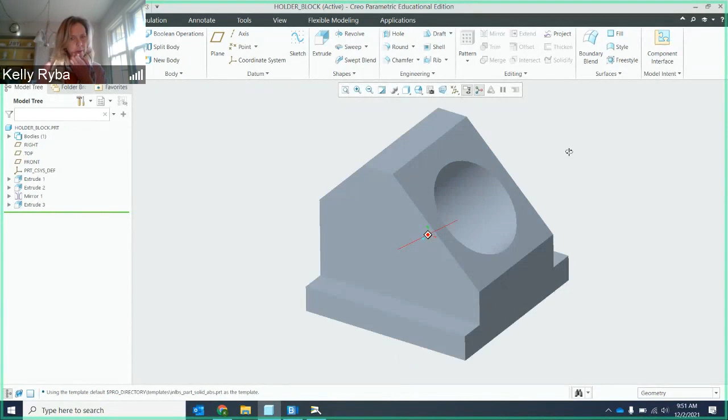I wanted to do a video on the process of doing our first extrusion, as far as the assignment in the extrusion problems—I think it's chapter 4 in your book. So here we have the holder block. I already created this, so I wanted to show you the process of going through and creating this model.

First and foremost, whenever we start Creo and get in, we want to be sure we set things up. I'm going to start a new file here, and we set things up so that our working directory is in the same place. I've already done that, I have a working directory set up. So before you start a new part, up here when you start new, make sure you have your working directory set up beforehand. It's not an afterthought.

We're just going to start new, and we want to start a part, okay, a solid part. I'm going to give it the name that it has here, holder underscore block, and I'm going to call it 1 because I already saved this other one in the background here. So I want to start a new one. I'm going to hit OK, so now I'll have a nice fresh screen here.

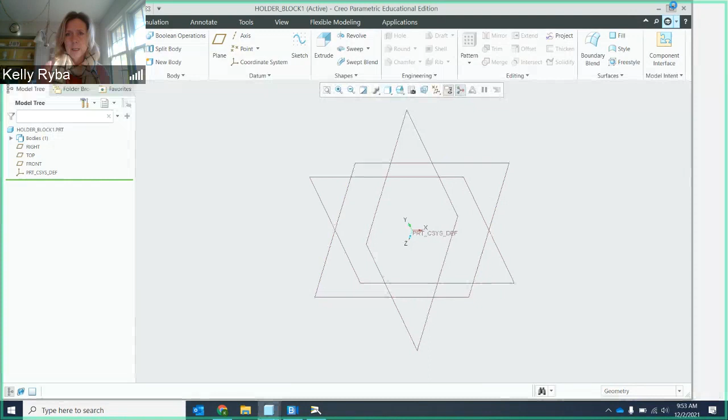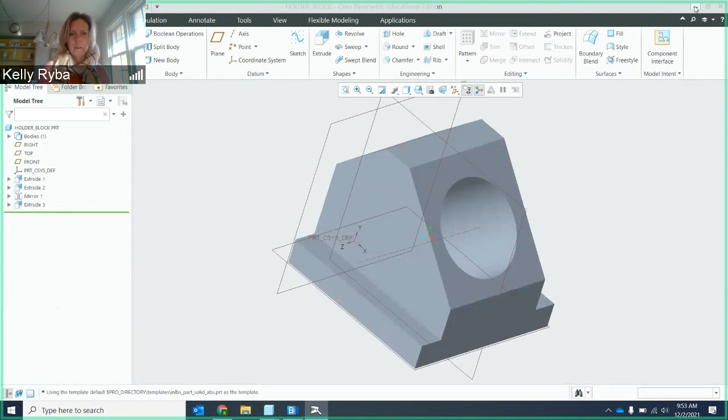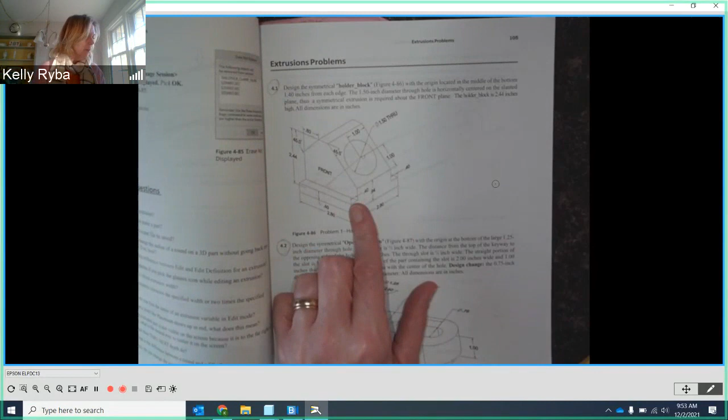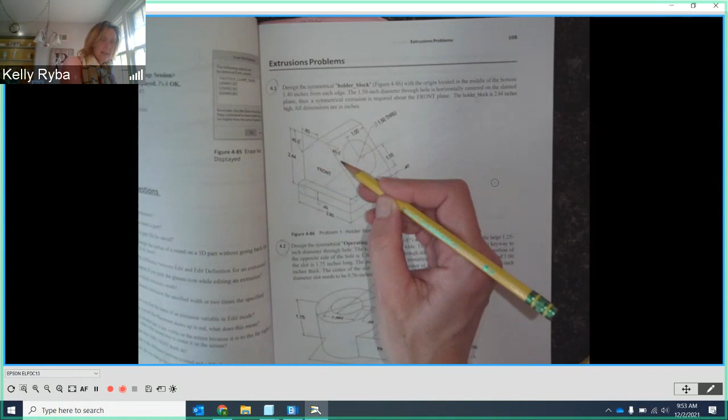So what I'm going to do is create the profile actually starting all the way at the bottom here, along this, as I'm looking straight in this direction. That's going to be the first thing I'm going to do, and I'm going to put that on my front plane. So I'm going to minimize this and open this back up.

I know that when I draw my sketch, instead of starting with the sketch here, I am actually going to start by saying I know that I'm going to extrude an actual sketch. So why not go right into the extrude? That's what you're going to notice we're going to be doing most often going forward. So I'm going to hit the extrude right away.

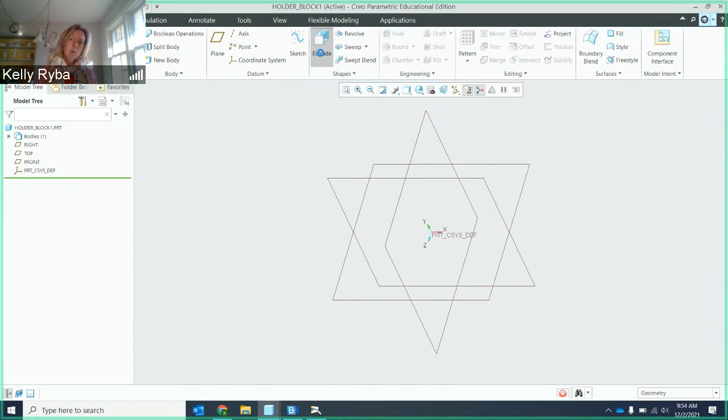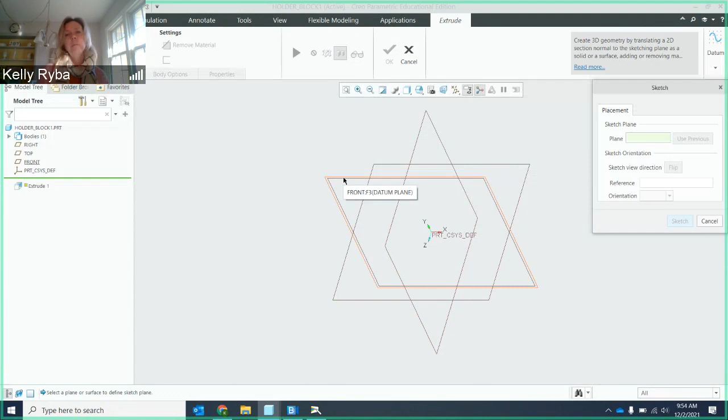When I do that, it wants to know what plane you're starting off, what plane do you want to place this on. So we're going to go to placement and do define. I'm going to hover over these planes, and when I do that it'll let me know what plane it is—you'll notice it says front here, or top, or right side. I'm going to go on the front plane here because that's where I'm starting. So I'm going to click on that, it's going to fill this information in, and I'm going to say sketch.

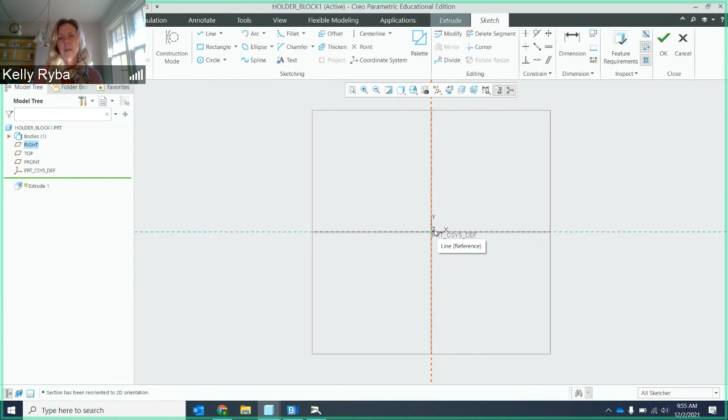Now, if your sketch plane doesn't automatically come up, you can hit this button right here, sketch view. And then now we're kind of looking right at it like a piece of paper, and I'm going to start sketching on here. Now because this is set up and it's like a really large screen right now, what I tend to do—because this is only going to be like a 2.8 by 2.8 footprint—I'm going to zoom way in, okay, way in, rolling a couple different times. Here's the intersection at the beginning here.

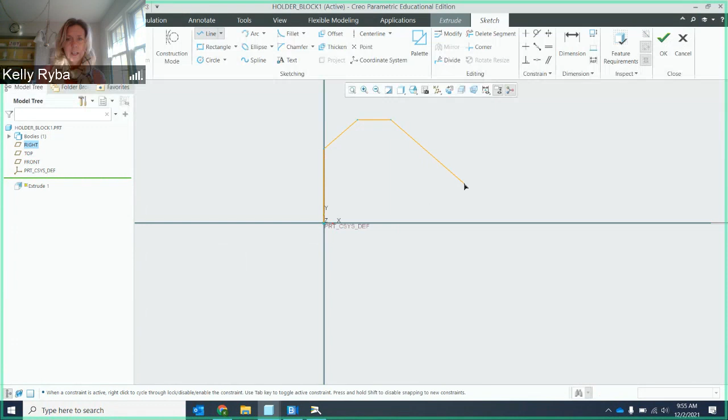So what I'm going to do is start in that bottom left-hand corner with a line, and I'm just going to draw the profile that I see there. So I'm going to go up a distance, a little over, a little bit of a straight, kind of down like this, down, and then click back, and then middle mouse button to end, and middle mouse button one more time. Now by doing that, you'll notice that I am zoomed way in, much smaller.

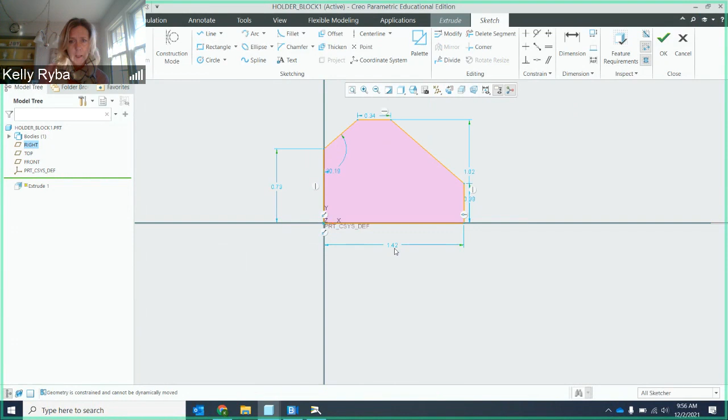So what I'm going to do is just push my dimensions out here, and I'm going to—oops, let me grab that—change them accordingly. So I need this dimension overall to be 2.8. Okay, so I kind of stretched it out there. I need this dimension—actually, I want a height dimension, overall height dimension. So I'm going to create a new dimension, click this top, bottom, and then middle mouse button over here. And this needs to be 2.44. So it's going to pull that up. Okay.

I'm going to here. I know it looks a little weird right now, that's okay. Then we're going to do a 45-degree angle from... actually, I'm going to wait on that because this is a little goofy right now.

I'm going to do a dimension from here to here, and that is going to be 0.8. There we go. And then I know that this is now going to be 45 degrees.

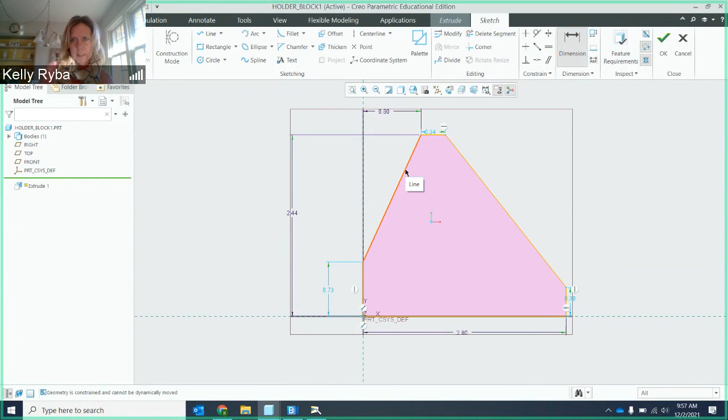Now it's a better time to do it. Otherwise, if I do too many things at once, sometimes it's going to get really skewed. So I'm going to do a dimension from here to here, and that needs to be 45 degrees. There we go, okay, all right.

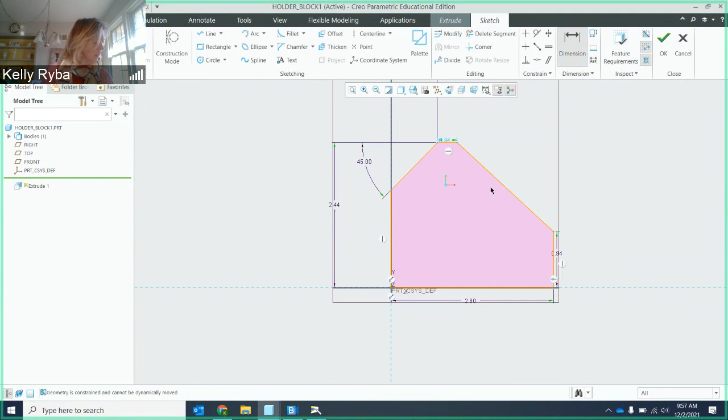Now what I'm going to do is add the dimension over here. 0.39 needs to be 0.94. Okay, and I think this needs to be a 45-degree angle too. I can't forget that. So this needs to be from here to here, a 45-degree angle there as well.

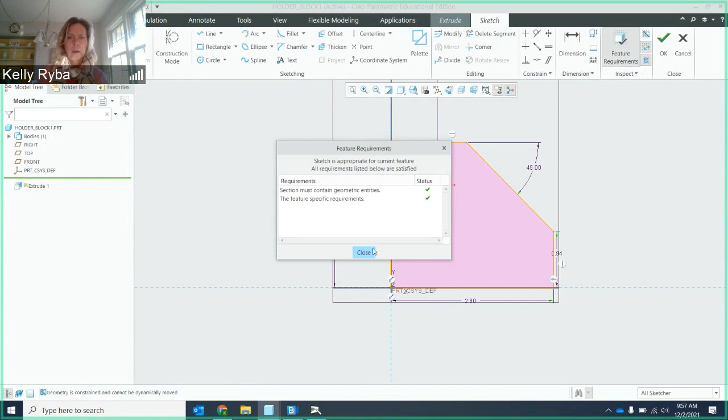Okay, there we go. So it looks like I have all the dimensions, and I like to, before I do an extrude, check if all my feature requirements are set. If I do that and I see only green check marks, I'm good to go. So I'm going to hit OK here, or close, and I'm going to hit OK.

Now it's going to go into the extrude mode right away. I don't have to tell it to extrude because I told it I was going to extrude before I started sketching, so I have to have a sketch to extrude. Now I'm just using my middle mouse button here to maneuver around, and right now it's assuming this is the direction I want to go in.

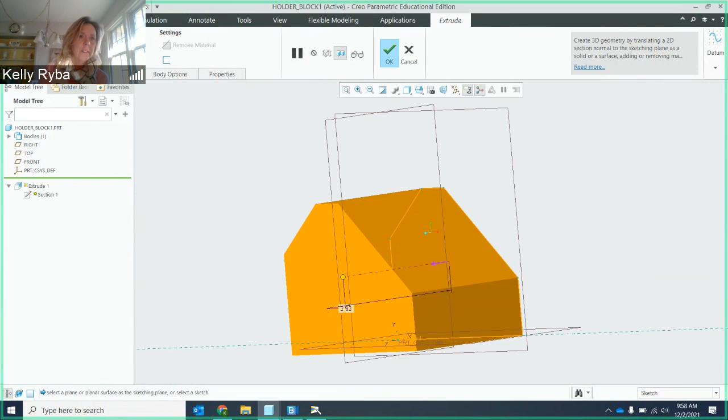I'm actually going to split this in the middle. So I'm going to do, what do they call that, an extrude symmetrically on both sides of the sketch plane. Since I was on the front plane there, I want to use that, and that's going to be evenly distributed in both directions. So I'm going to click on that, and then this is going to be the overall depth, not just one direction, okay? It's going to be the overall.

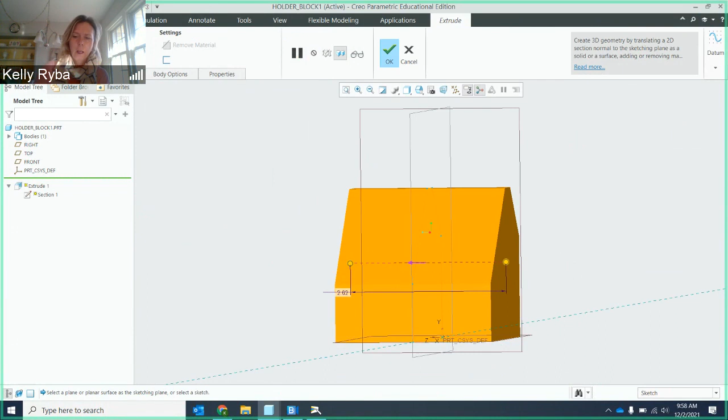So if we look here and I go to the side, it's the full thickness. Now, when I look at the full thickness of this extrusion, it's going to be 2.8 minus 0.8, because either one of those feet on either side is 0.4, and I only want the section in the middle. So this is going to be 2 inches.

Okay, so there we are. There's my base, if you would, kind of the body of my block. And I'm going to hit OK. That looks good to me.

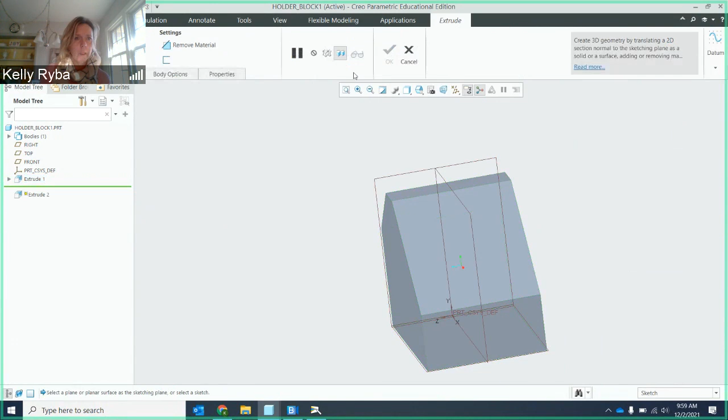All right, now what I'm going to do is add my feet to the ends here. So I am going to do an extrude, and I want to place my plane again, okay? I'm going to define it and place it right here. I want to look at the front of it, okay? And I'm going to hit sketch, and then do my sketch view so that I'm looking straight on, okay?

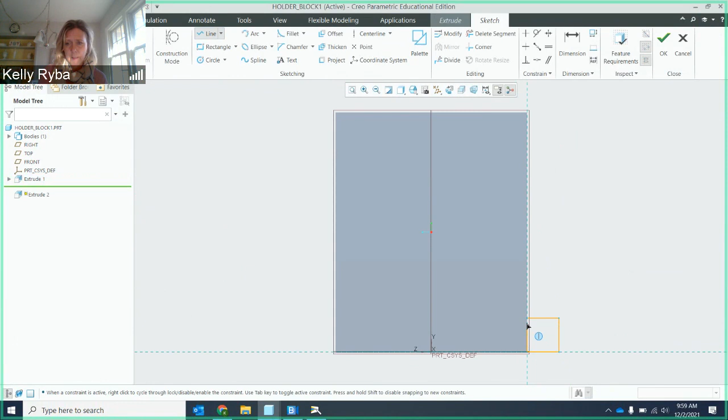Now what I'm going to do is sketch the profile of one of the feet. So I'm going to go line, down here, and I don't want to click to anything except — no midpoints or anything like that, so be careful not to do that. I just want it to be coincident there, and then you have to close the box, okay? Even though you're kind of putting it on the side there, you have to close the box.

So here's my dimension, 0.35, 0.33, and I'm going to change each of those to 0.4. Okay, and that should be all I need.

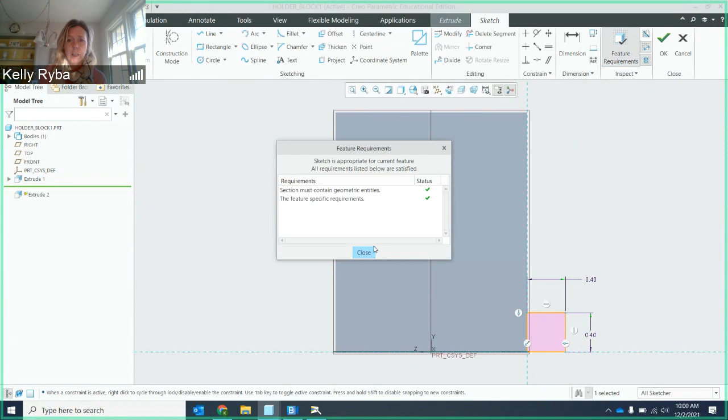So I'm going to just recheck my feature requirements. That looks good, so I'm ready to extrude. Okay, and then when I come back over here, I always like to maneuver myself around and see which way it's assuming. So I don't want it to go out that way, right?

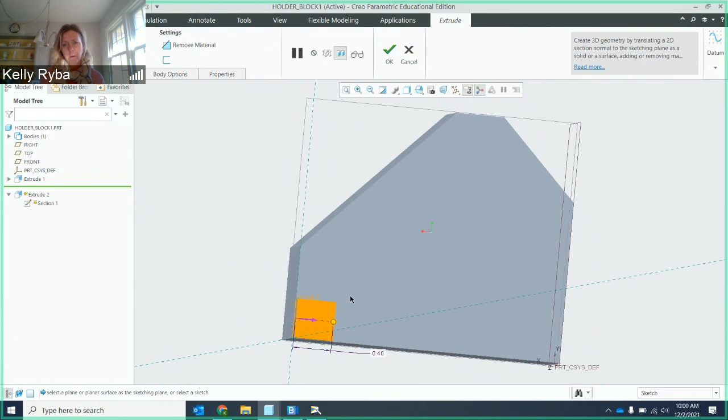I want it to go the opposite direction. So what I can do is either flip it up here by the number on the menu, or I can just simply click on that purple arrow. Okay, and now it's going in the right direction that I want it to go in.

And I need that to be a depth of 2.8. Okay, and there it is. Once I'm like, okay, that looks good, I'm going to hit OK. Okay, that's done.

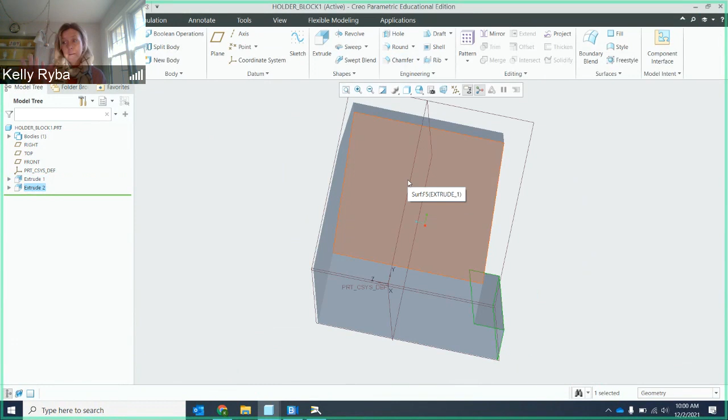Then the next thing I can do now, since this is the very same size on the opposite side, I can mirror this. I could redraw it and do the same process on the other side, but why? I'm going to mirror it.

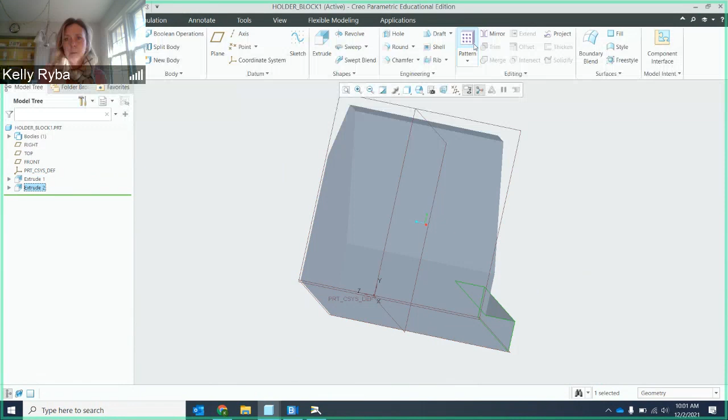You'll notice that I have extrusion number 2, which is what I just created. I have that selected, and what I'm going to do with that is mirror it. So right to the right of the pattern here is mirror. I'm going to mirror that.

It's going to say select my mirror plane. I just need to reference the plane. So here's the reference, and I'm going to reference what would be my front plane. I want to select that plane right there, and now notice that it added it right there, so it mirrored it about that center plane. That's why I put the center plane where I did, so that I could re-reference it back.

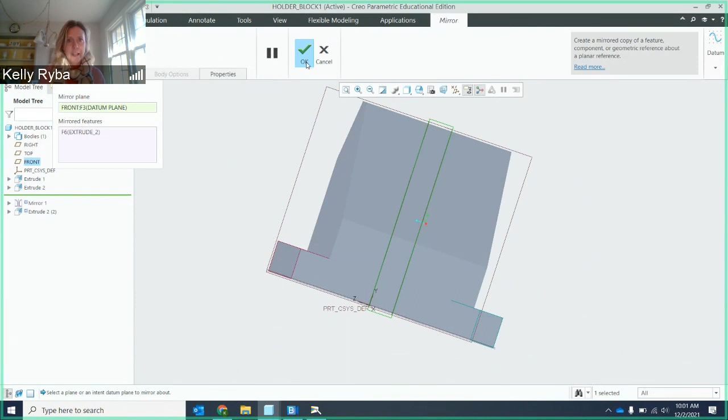Now you'll notice that I have my 2 feet on either end. So the last feature I need to add is the hole going all the way through. I'm going to do another extrude. Now you could do a hole function here, but I don't really care for the hole function.

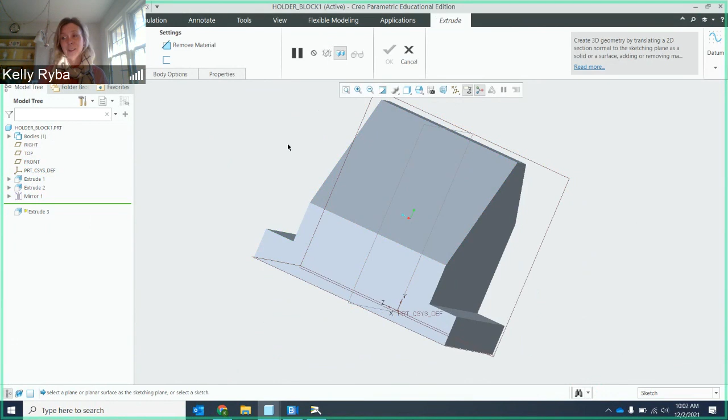Honestly, I like it if it's bigger holes like this. When it's hole patterns, it makes sense to do them, and there's some instances where it's a little bit easier, but I actually like to extrude them. I think it's easier, and it's also easier to change them later on as well, in my opinion.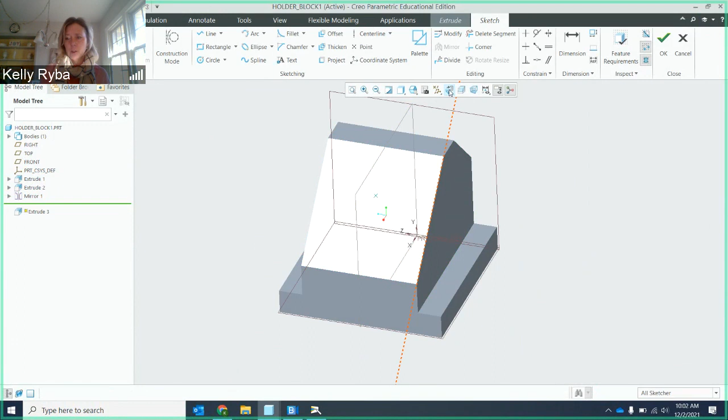So placement wise, I want the placement to be on this angled surface. I'm going to go to placement, define on that angled surface, and hit sketch. Then I'm going to hit my sketch view here, and now I'm looking straight on. All I'm going to do is draw a circle there. That's going to be my hole.

I'm going to try to get close here, but I am going to use the dimensions that they're giving us from the edges that they have there. So you'll notice here I've got a 1.6 diameter hole. This is going to be 1.5. And then dimension wise from this edge, as I look, I'm going to be 1 inch.

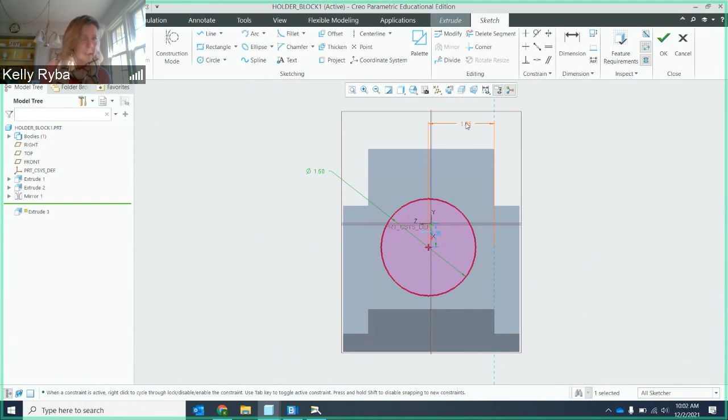And then we're actually going to go from this surface, this bottom surface here up. So I'm going to do a dimension from here to my center, and go over here with my middle mouse button, and that is going to be 1 inch as well. So there we have it, my hole is in place.

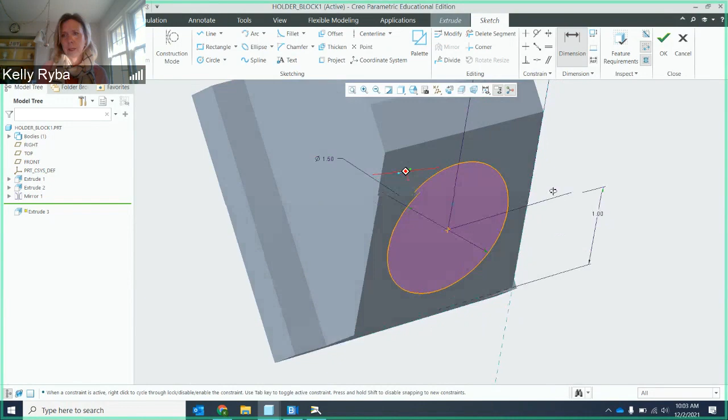I'm going to recheck to make sure that my requirements are good so that I can extrude, and I am. So I'm going to hit close on that and hit OK. Now, the assumption here always is that it's a solid, so they have it going in the opposite direction.

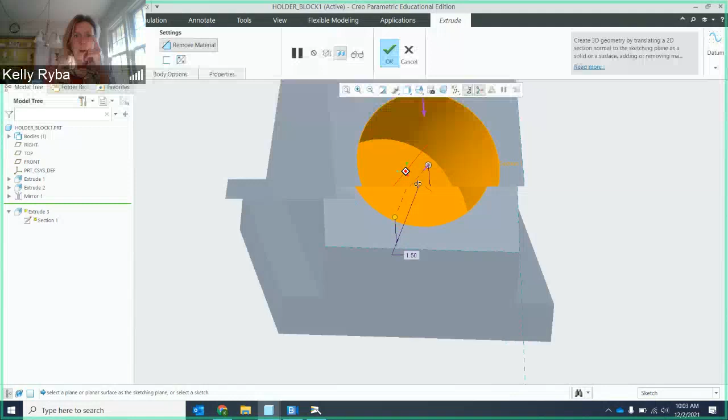I actually need to do 2 things here. I need to change the direction here. But it's solid, and I want to remove material. Oopsie, I want to remove material. And I want it to go all the way through the part.

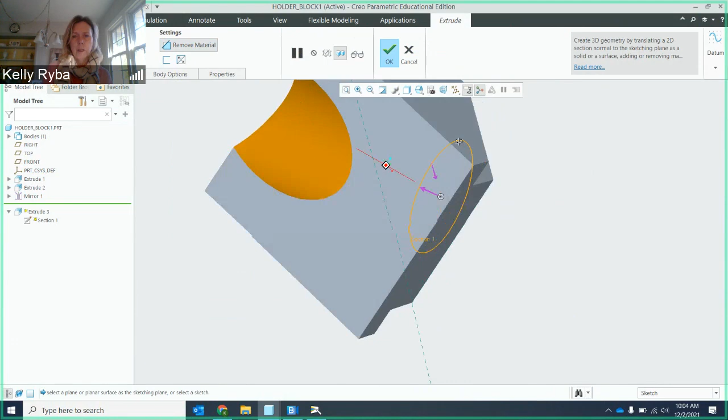So the depth here, I'm going to set to, what does it say when it goes here? Extrude to intersect with all surfaces. So I'm going to click this. And when I do that, notice that it's all the way through the bottom here. And that's it.

So now I have my part. I'm going to kind of zoom in here, and put it on standard orientation. See how that looks. Now I want to have some sort of orientation where I can see that the hole went all the way through, or show all the features.

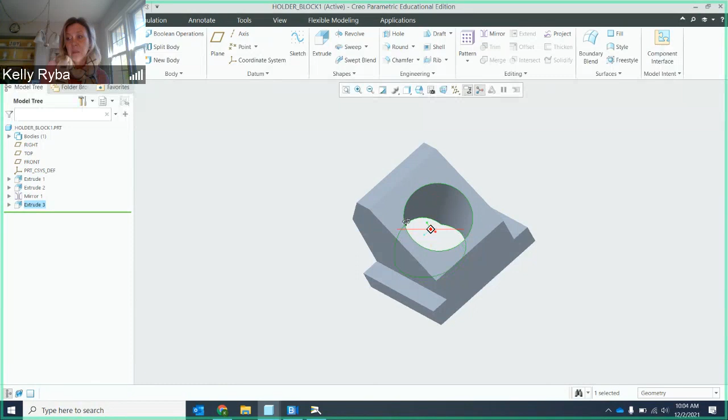And so what I want you to do is just kind of maneuver this, and something like this looks pretty good. And what I need you to do, I'm going to zoom in and maybe go a little bit closer here, and then to hand this in to create that snapshot, you're going to use your Windows Shift S. And what I'd like you to do, make sure when you do this, is I need your model tree in there as well.

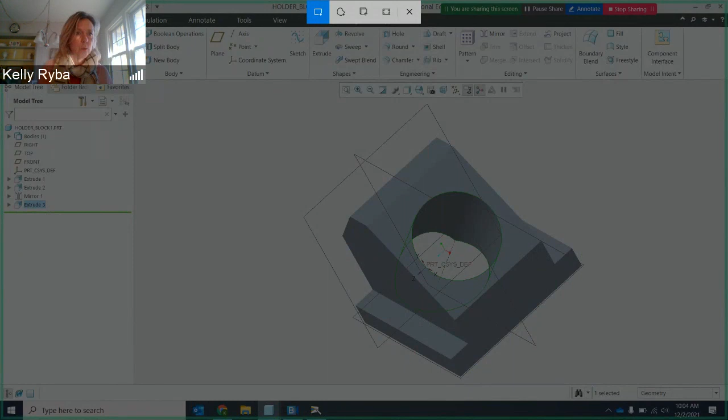So I want to see the model tree, because when I look at that model tree, if there are any little rectangles next to any one of these extrudes, I know they're not fully defined, or completely constrained. So that's what I look for to make sure that you completed it and that it's good geometry.

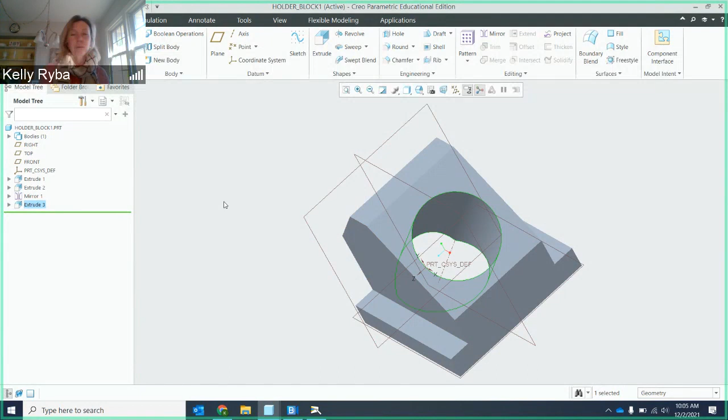So that is your problem 4.1. If you have any questions, let me know.